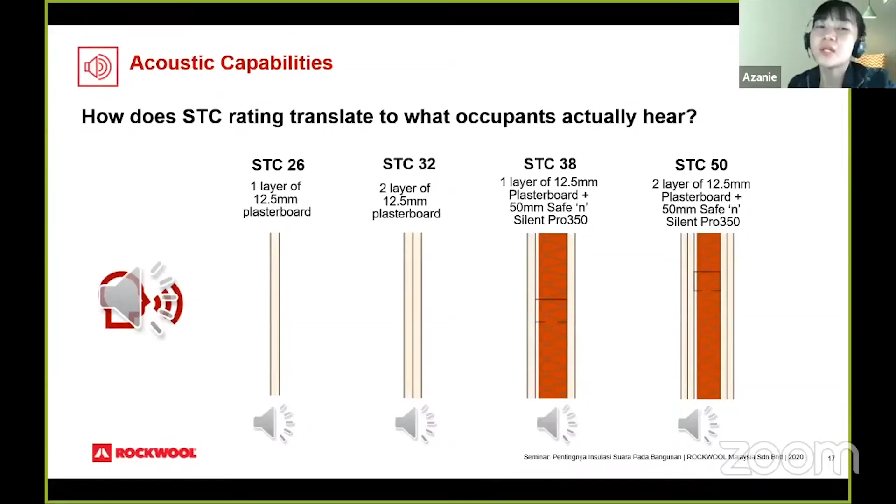So, STC measurement, how do you actually calculate it? STC actually, as I mentioned, you look into 125 up to 4000 hertz. So what they do is once you have this transmission loss, they plot it again against the reference curve.

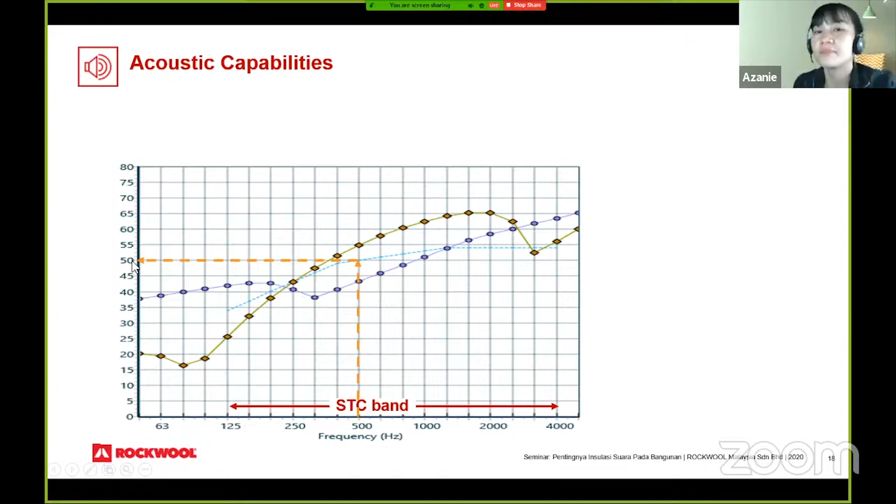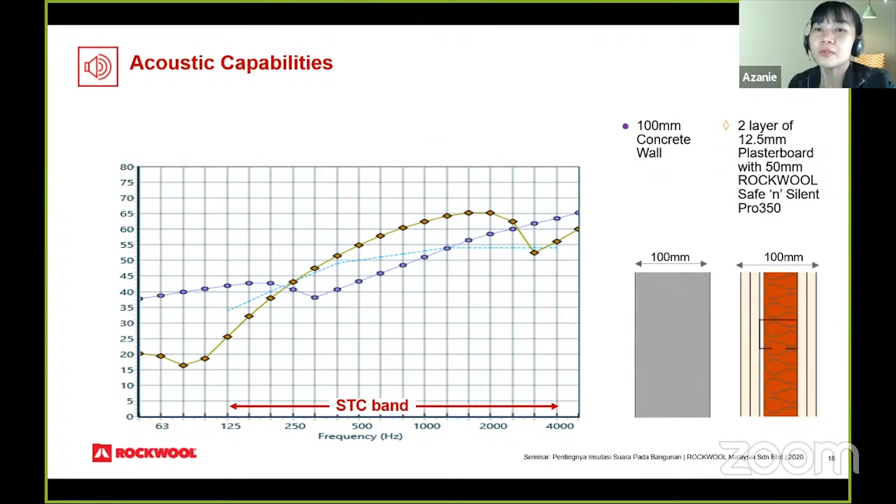So here I want to highlight the performance of two systems. One is actually a concrete wall, 100 mm. Another one is a drywall, also 100 mm. Roughly people think that because concrete walls have higher mass, usually they will have higher STC value. But based on this STC performance, you see that both are actually almost similar, where the drywall is around STC 50 and the concrete wall is around STC 49.

The thing is, with STC, it actually does not tell a full picture because of the measurement frequency range, looking into 125 to 4000. If you look here, the purple color would be the transmission loss of the concrete wall, and the yellow color would be the transmission loss of the drywall. You have here a deficiency for the drywall, which is the frequency resonance below 125. But because it does not take this into consideration, it's not accounted for.

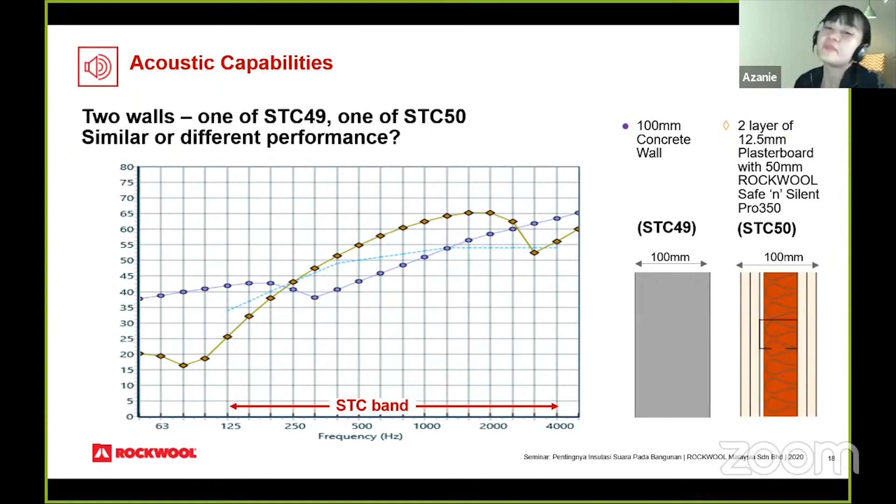At the same time, the concrete wall, with higher mass, has high low-frequency transmission loss, but again it does not get the benefit in STC. For the mid frequency range, you can see that drywall actually performs better and gets better performance in that area. So when we talk about STC, it's actually just an average decibel reduction. This average does not tell the full story - you may think it performs similarly, but depending on the noise and the sound we hear in the environment, we may see different performance in the field.

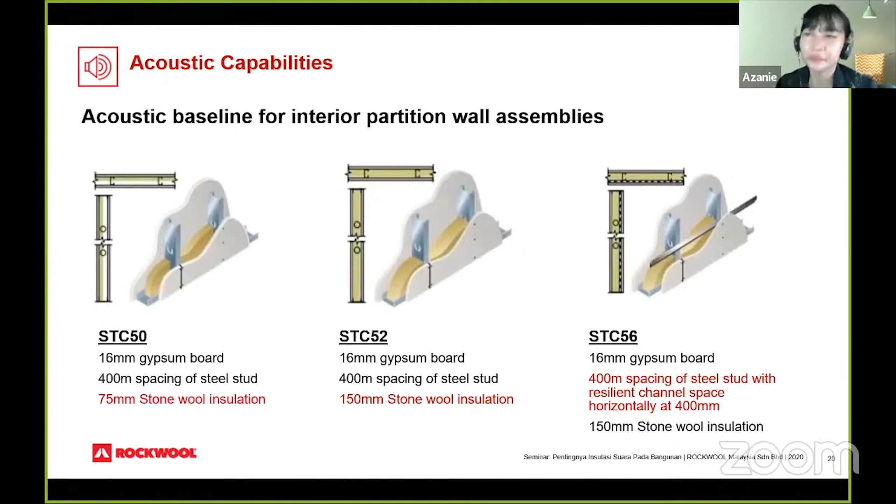Okay, another thing I want to highlight is how you can design for effective interior acoustics, especially in the office area. Let's say for example in an office area, you may want to put up certain partitions. Here, let's say you have a meeting room, and next door you have an open office area. The thing is, mostly people just look into the wall, thinking that putting up an acoustic wall can also block the sound passing through - because sound can travel so many ways. It can go up through the ceiling and pass through there.

So if you want to have, say, your wall at STC 40, putting up these kinds of modular ceilings is not advisable. It's very hard to get the ceiling performance you need, because if you look into the CAC, the ceiling attenuation class, you need a range of around 40 as well as a high NRC rating. It's very hard to find that kind of performance with a modular ceiling.

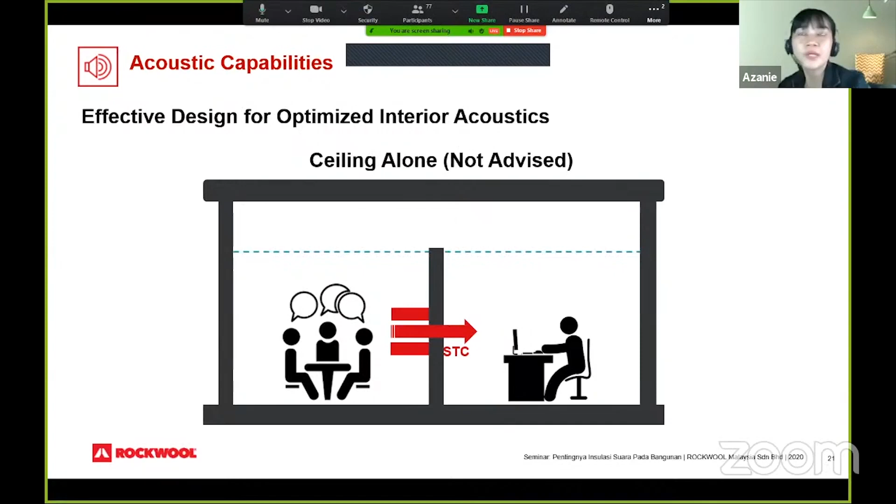So most of these ceilings are just very traditional, lightweight, a few layers, and they do not have enough mass to actually block the sound from one side to the other.

Another problem is that for an office, you have a lot of penetrations on top of the ceiling - light fixtures, devices, and HVAC. All of these can contribute to flanking sound passing through the ceiling, which makes these ceilings even less effective at blocking sound.

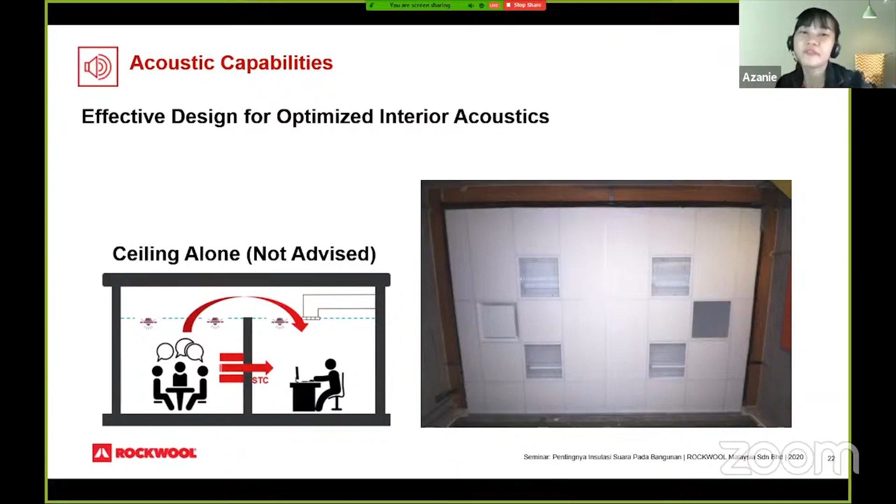So what can you do? Have a full height wall. So you have a partition that does not stop just at the ceiling - make sure it goes up to the floor level above.

Another thing is for any duct, use a rigid metal elbow duct with internal lining, which is insulation, over the air grille operator, and put acoustic sealant at every perimeter of the wall.

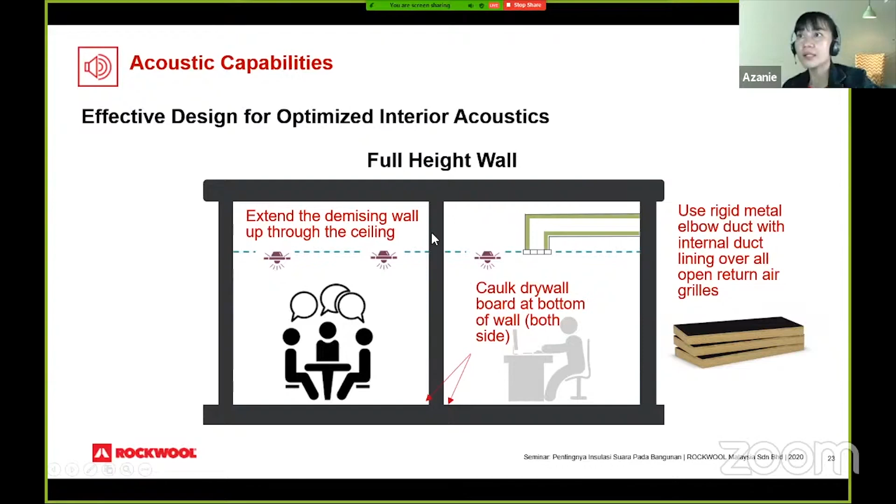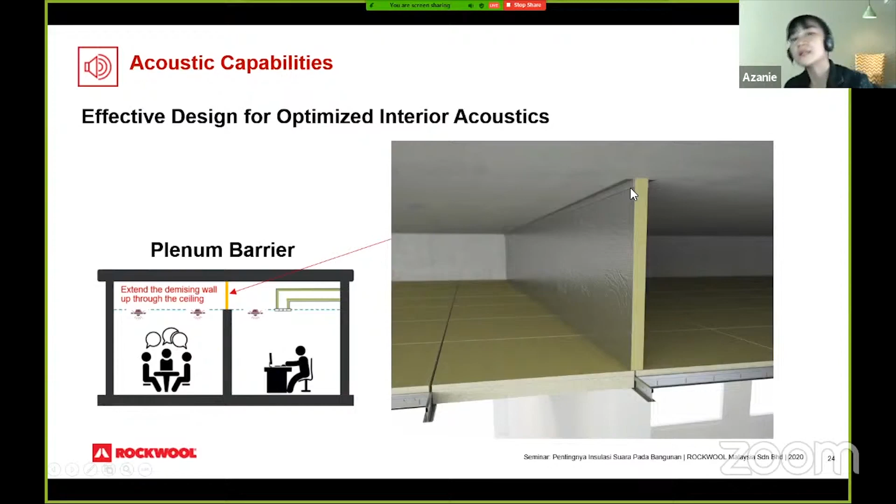Sometimes because of the design, the height of the wall only goes up to the ceiling. What you can do is also put a plenum barrier. This is just an example of a plenum barrier made with stone wool, where the only thing you need to do is very easy - you just mechanically fasten it between the support angles.

In this section, we want to look at why stone wool is an excellent acoustic solution. These are the four characteristics.

The first one would be airflow resistivity. When we say airflow resistivity, it's actually airflow resistance within a unit of thickness, which in layman's terms means how well you can block air passing through the fiber. The higher the airflow resistivity, the less air permeability, meaning less sound can pass through the insulation or material.

Density is another key factor that improves airflow resistivity. If you increase the density - here's the graph - you also increase the airflow resistivity, which allows less sound to travel through the material. So for some system performance, you may want higher density to achieve better sound transmission.

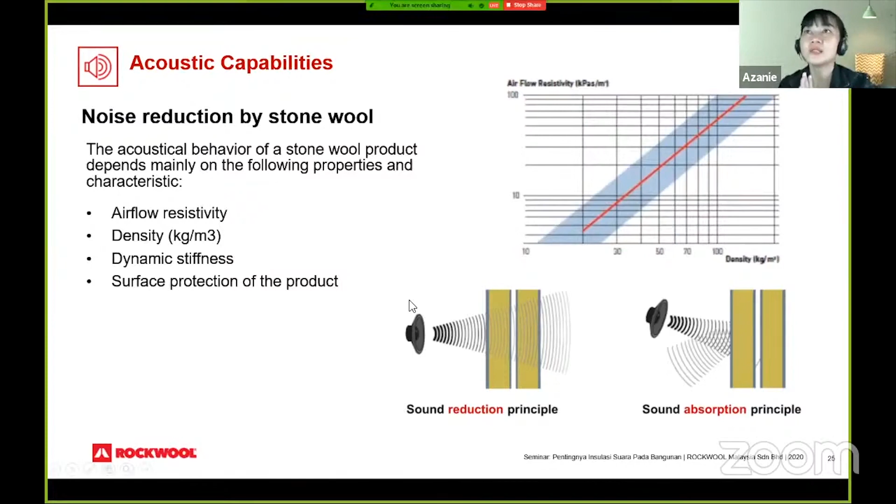Okay, let's look into rain noise performance. Metal roof has been a common design in any single building. The problem is with metal roof, especially in this tropical country, Malaysia or Indonesia, we experience very heavy downpours. All this water droplet fall onto the metal, and you can actually hear that drumming effect. So in warehouses, sometimes they just put metal with some reflective foil, reflective insulation.

It might be better in terms of thermal, but the issue is when it comes to rain noise, during the heavy downpour, you can't even hear what you're talking. Even just a person next to you, you can't hear what they're saying, because the drumming effect is very loud.

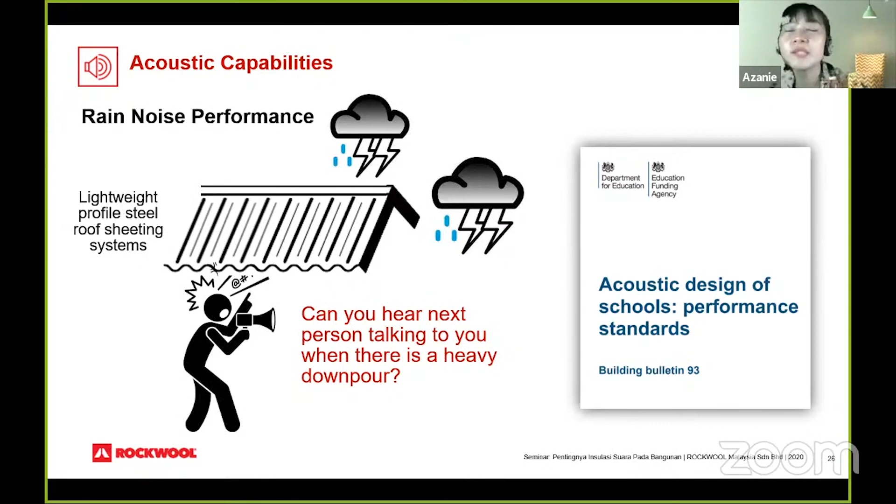There are not many standards that I know of that consider rain noise performance. There is one, BB93, a UK standard that does have consideration of rain noise. What they do is take the rain noise measurement, translate it to sound pressure level, and make sure that the sound pressure of that rain noise should not be more than 25 dB of the ambient noise of that particular room.

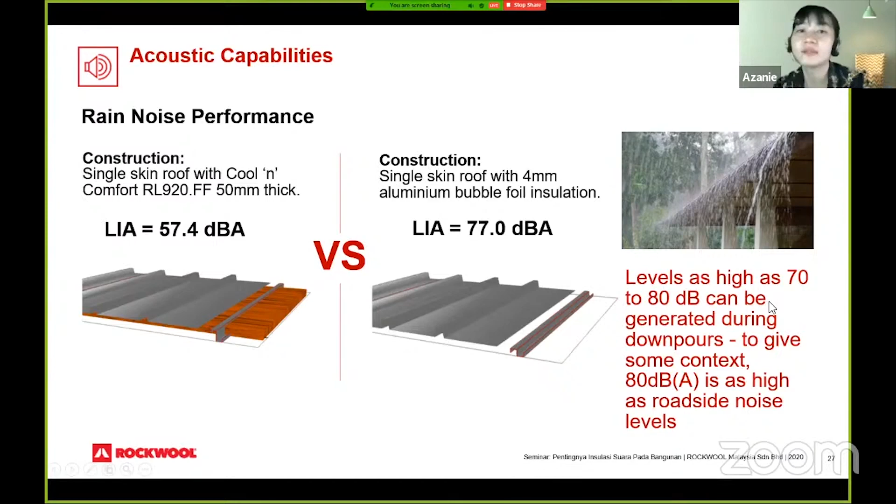Okay, what kind of system can you use with our insulation? Here are just a few examples. These are tested systems.

For single skin with insulation, you can find this in our brochure. Roughly, for 50 mm you will get STC 33, and for 100 mm you will get STC 38. We also put the rain impact noise based on rainfall intensity around 40 mm to 300 mm per hour.

So in this case, if you have a ceiling underneath, you will actually increase the STC value more, and you will reduce the rain impact intensity more.

Here is the case of double skins. A double skin without insulation, you will get around STC 30. Double skin with 50 mm insulation, you will get around STC 38. So the rain impact is worse without insulation, and you're able to reduce it by adding insulation.

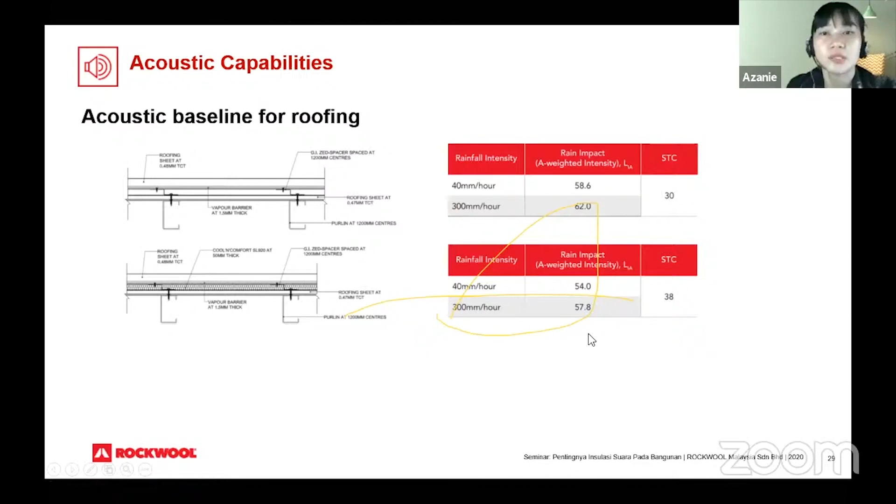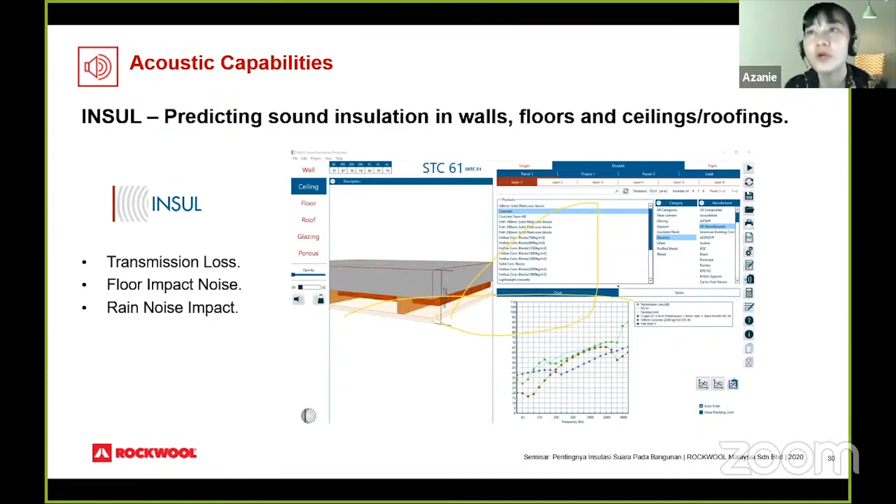We actually offer, through our software, to help any architect with a specific project determine the roughly performance measurements. What we use here is Insul software, which can measure the transmission loss, the floor impact noise, as well as the rain noise impact. So that is about it.

About STC. Now let's look a little bit into room acoustics. Room acoustic is the acoustic property within the room itself, measured through reverberation. As Pak Matthew mentions, roughly for a speech room you will need around 0.5 to 0.6, or if you want something like a musical room with high vibrations, you may want a higher reverberation sound. In terms of determining the reverberation of that particular room, you need to know the sound absorption value of the material.

Okay, there are two performance measurements. The first one is NRC, calculated based on ASTM C423. It's just an average sound of 250 to 2000 Hz. They do the measurement to get a performance value from 0 to 1. So if you look into the material data sheet, you will see that the NRC is around 0.5.

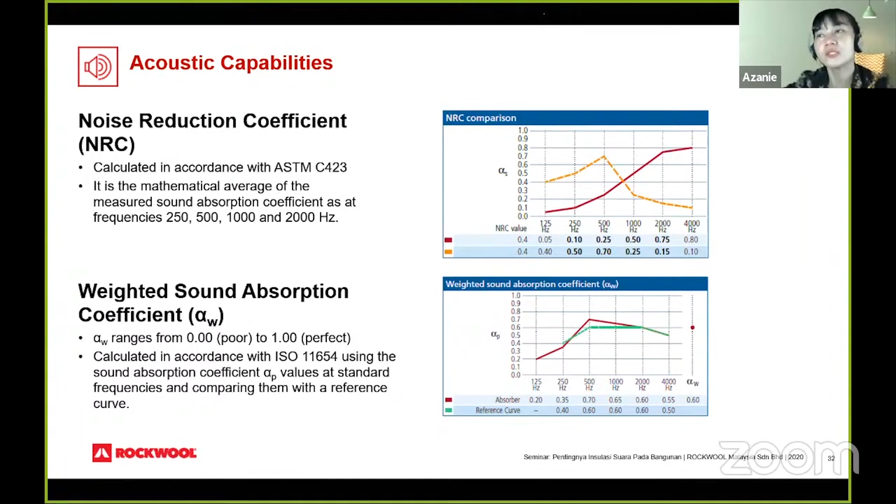So roughly it's slightly absorb as well as slightly reflect, where 0 is totally reflect, 1 is totally absorb. Another measurement they may want to look into is the weighted sound absorption coefficient, an ISO performance. It's the same: 1 will be total perfect absorption, 0 will be total reflection. It's just that sometimes the measurement value on how to do the single rating is slightly different.

In terms of our Rockwool Stonewool, here's an example, you can get more information from our data sheets. For Safe'n'Silent, we're roughly around 50mm. So it's based not just on material, it's also based on thickness. In this case, the higher the thickness, the better the NRC value. For the Safe'n'Silent partition product, roughly we're around 0.9 and the rest around 1. For Cool 'n' Comfort, mostly for roofing application, will be around 0.9, will be around 1 value.

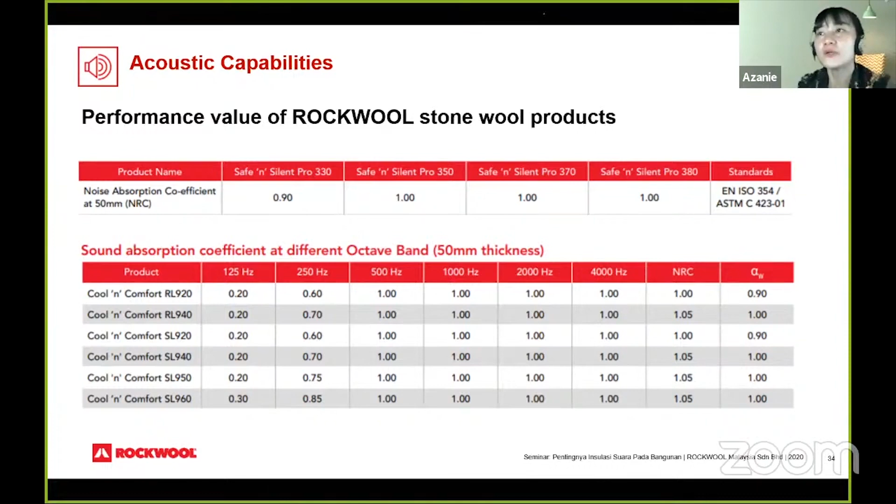We also put the measurement of the value at every single frequency.

Rockwool stone wool is actually a porous material. It consists of coherent material and cavity, which makes it a very excellent material to absorb. We are very resilient, and absorb all the vibration. We convert all that acoustic energy into heat.

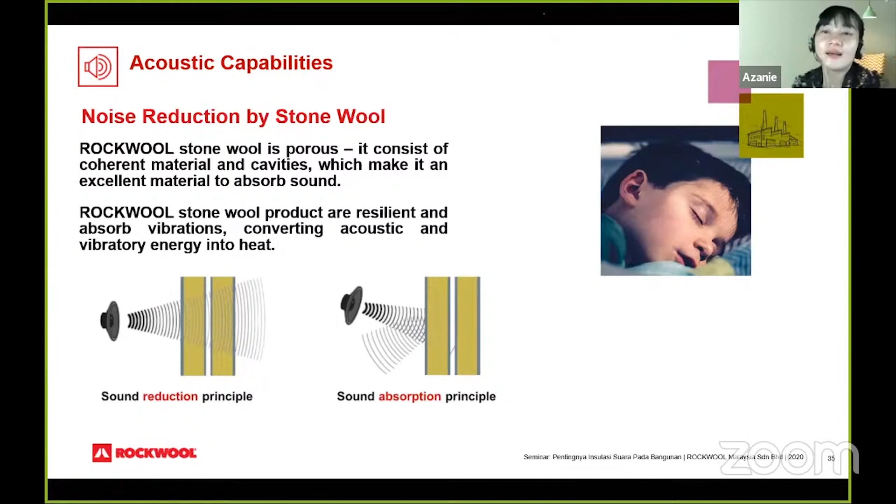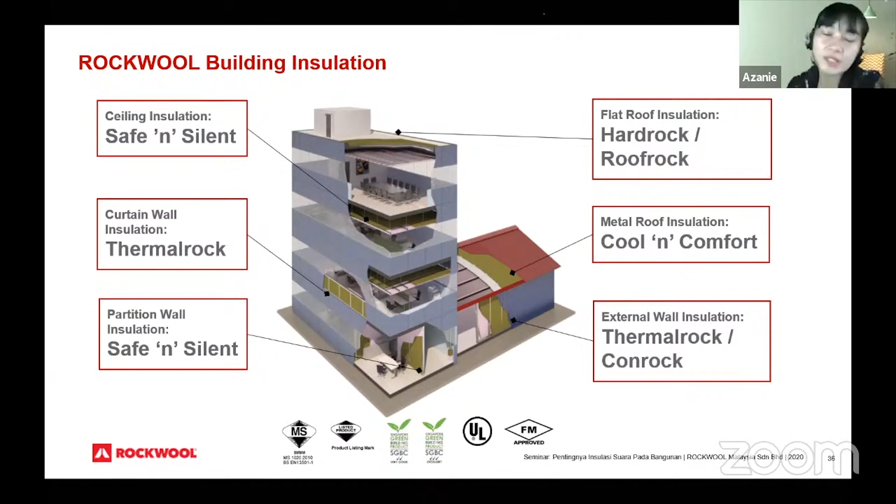That's it about insulation. So just roughly, I want to talk about our products. We have a variety of product models depending on the applications. You can find more from our representative in Indonesia.

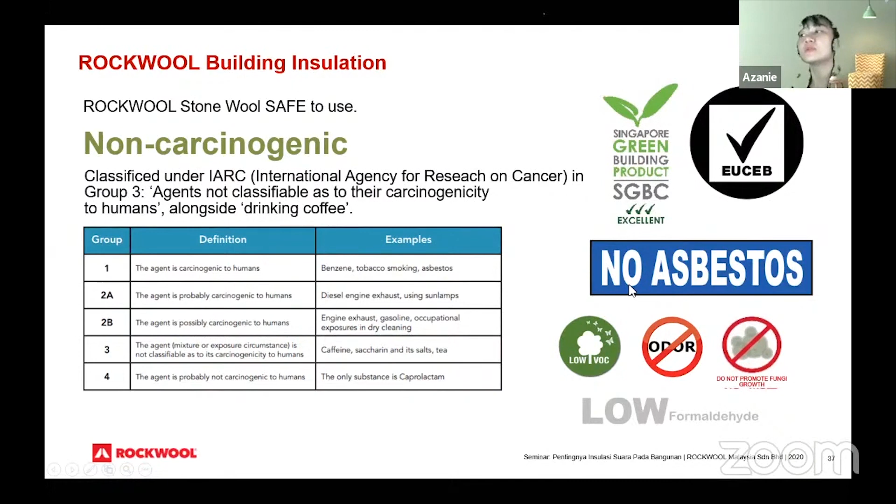Some of you may have concerns about safety, because you think that handling Rockwool, you might inhale the fiber and it has detrimental health effects. But let me tell you, we are safe to use, safe to install, we are non-carcinogenic. It has been classified under IARC, one of the organizations under WHO, that says our rock wool stone wool is non-carcinogenic, under Group 3. We also have some of our product material Green Label certified. We have no asbestos, low TVOC, no odor, does not promote fungal growth, and low formaldehyde.

You can browse our Rockwool Asia website, where we have some tools to assist in your specification or project. We have BIM for you to use. We have an RT60 calculator, which is the room acoustic calculator. We also have U-value as well as specification toolkit.

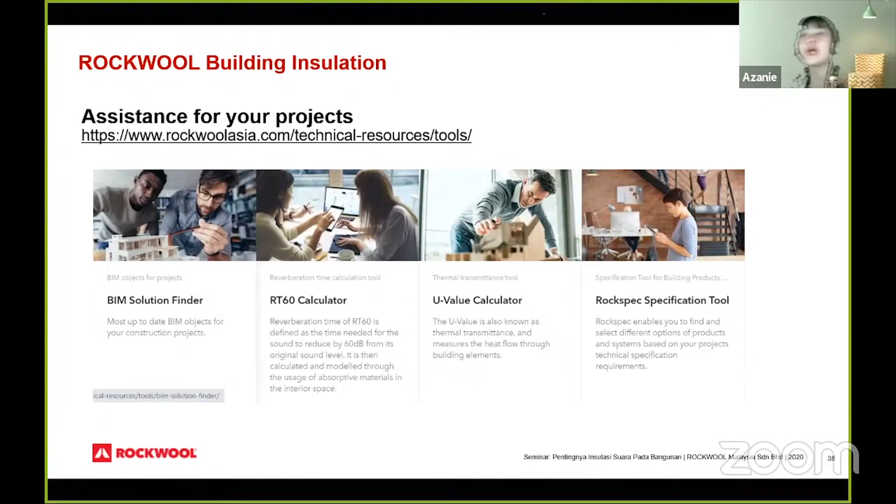Okay, with this I end my presentation with this video. It's actually a very nice video by our Rockwool group talking about the acoustic performance.

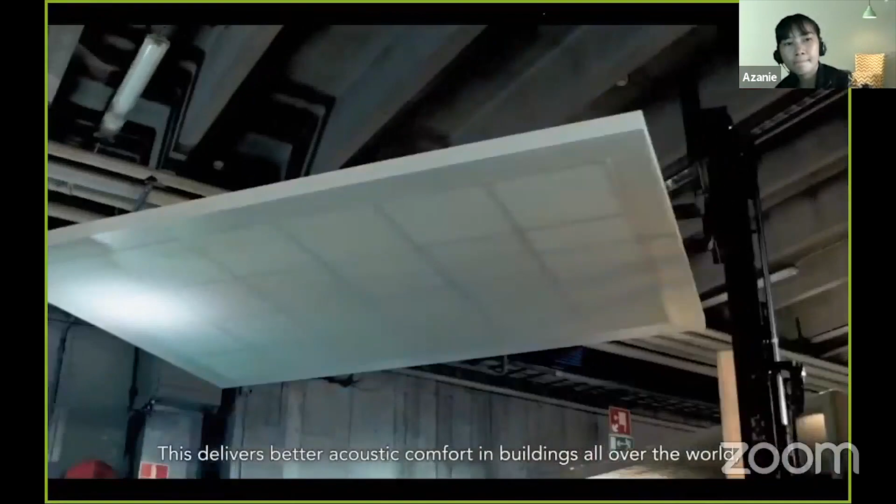Hi, I'm Sten Lindby, head of R&D at Rockwool, and these are the Stone Rockers, our company band. I'm here to talk about the amazing acoustic capabilities of our products. Through sound insulation and absorption, our products can optimize the acoustic performance of a room. This delivers better acoustic comfort in buildings all over the world, from offices and schools to hospitals and hotels. Unfortunately, it also means that the Stone Rockers think they sound better than they actually are. Luckily for us, Stonewool also has amazing soundproofing capabilities, helping to isolate and control vibrations and block out unwanted noise. For peace and quiet when you need it most. Back to work.

Acoustic capabilities is just one of the amazing seven strengths of stone we harness in our products to enrich modern living. If you need any more information, you can contact our representatives in Indonesia, Pak Leonardo and Carolina. With that, thank you.

Thank you, Ibu Azanie. Very interesting presentation. You get the basics of how sound works with the STC and dB standards, and other standards that you explained before.

Oke, artinya ini bisa dilakukan sebenarnya dengan cara mengukur suara di dalam ya, tanpa perlu simulasi kan sebenarnya? Ya, betul. Oke. Kebetulan ada proyek saya juga, saya lampirkan nilai tabelnya. Nah, seperti ini.

Tingkat bunyi yang dianjurkan. Jadi misalnya ruang kantor umum 40 sampai 45, itu cukup dengan spectrum analyzer, kita ukur di situ berapa suaranya pada saat ada suara yang besar tadi, pada saat ada bola gitu. Jadi misalnya kayak ini yang kebetulan saya highlight biru itu untuk kantor umum, nilainya perlu sekian gitu.

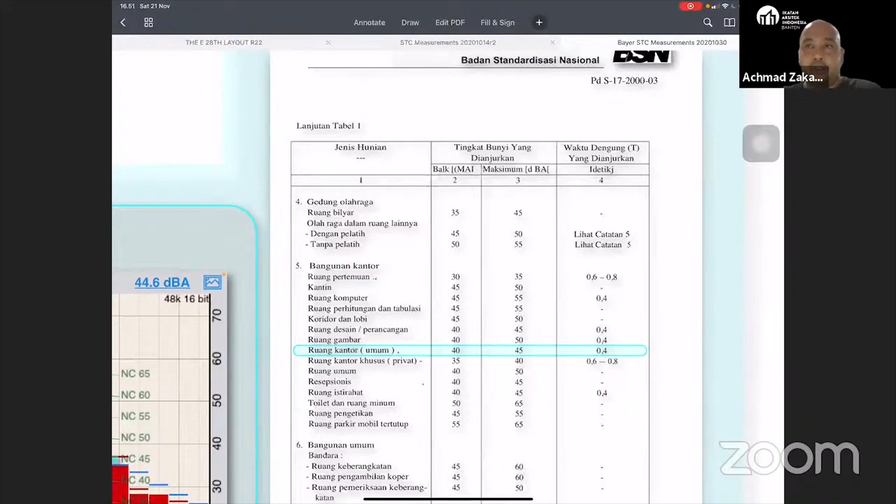Oke, yang sebelah kanan adalah reverberation time yang tadi disebutkan Bu Azani. Harus begitu, Pak. So, Pak, itu referensinya tadi ada di situ ya, referensi SNI, di sini, tabel ini. Oke, bisa di-capture, itu nantinya bisa jadi referensi rujukan ya untuk Bapak Muhammad Arif ya.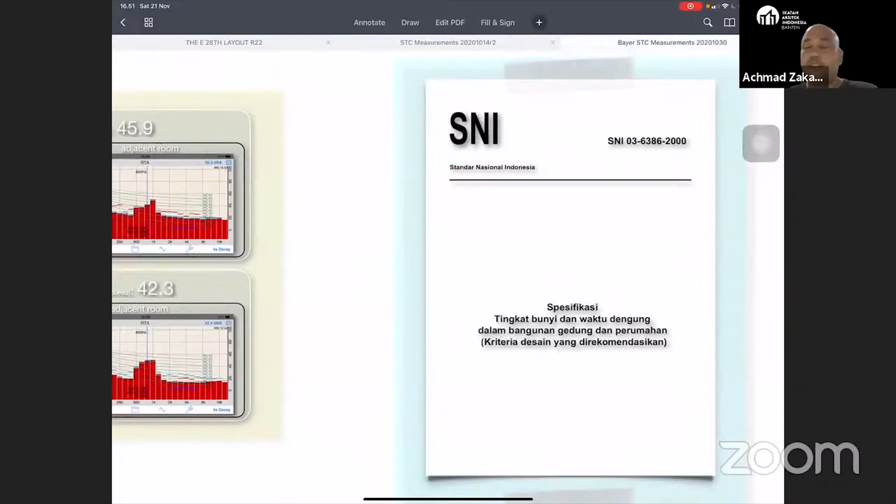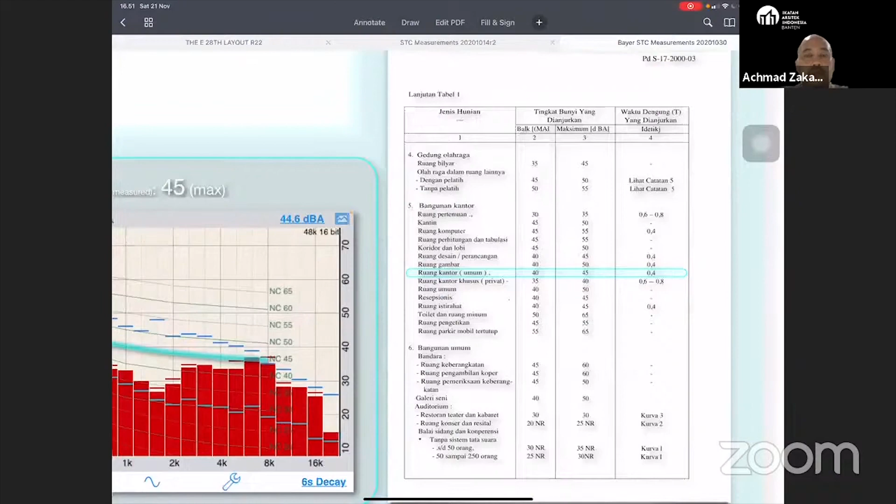Sehingga apapun ruangan di situ, apakah semua ruangan ada di situ, Pak? Beberapa ya, ruangan pada umumnya, Pak ya. Di sini ada hunian, ada office, ada macam-macam di satu bundel tabel tersebut, satu bundel dokumen tersebut ada berbagai macam ruangan. Oke, bahkan bandara juga ada dan sebagainya.

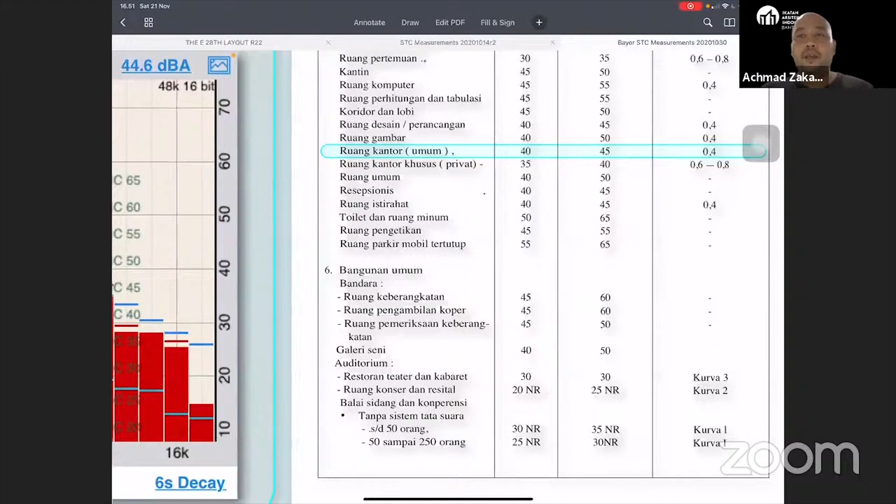Oke, tapi untuk meramu STC berapa yang dibutuhkan, itu perlu diskusi yang lebih ya Pak. Artinya perlu advice Bapak atau Ibu Azani misalkan. Betul, perlu advice dari konsultan tentunya, supaya menjadi fair buat semuanya. Ya, terutama masalah budget juga ya berarti. Betul Pak, dan impact segalanya ya, waktu dan sebagainya.

Waktu betul. So Bu Azani, do you get the question about the office next to the stadium? We Malaysia does not have any specific guideline, but we do have under GBI roughly just saying what's the guideline for the ambient noise, that's all for particular area. For that, that's the only cases. But sometimes it depends on the consultants what kind of the guideline that they want to use for that particular design of the buildings.

Okay, so another question from me following Pak Muhammad Arif is, in your presentation you're talking about interior, you're talking about ceiling, you're talking about the roofing insulation. So what about the facade? Can your material go in the facade as well?

A facade, usually it depends. If you have got the wall, it's mostly glasses, you don't use insulation as much, only on certain floor area that is mostly for the fire performance. But that's just a very small area.

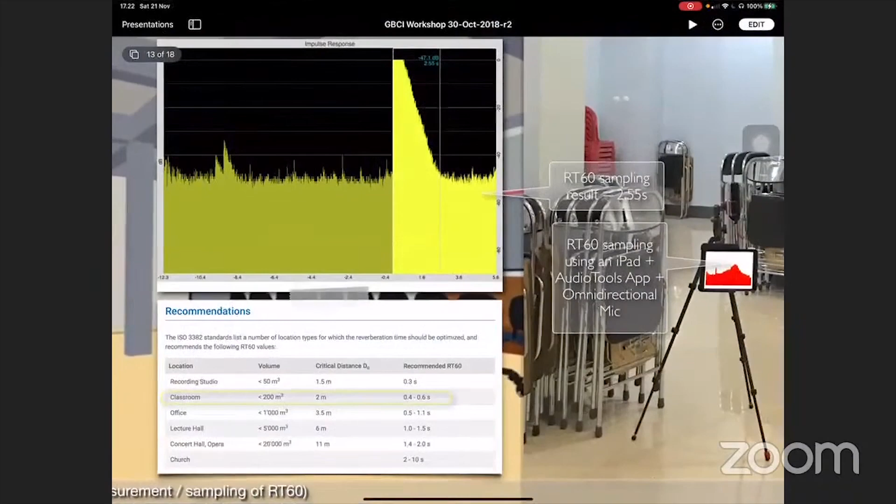Itu yang kita lakukan, modeling dari berbagai bahan. Jadi kan alternatifnya ada macam-macam.

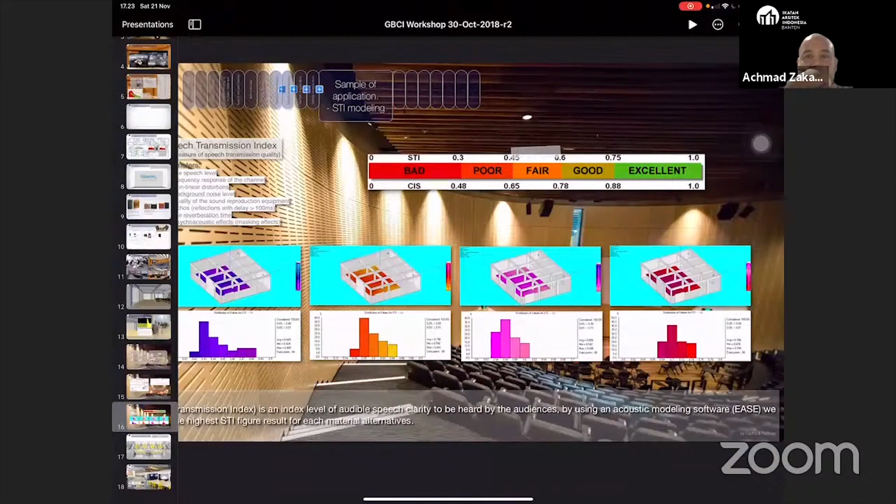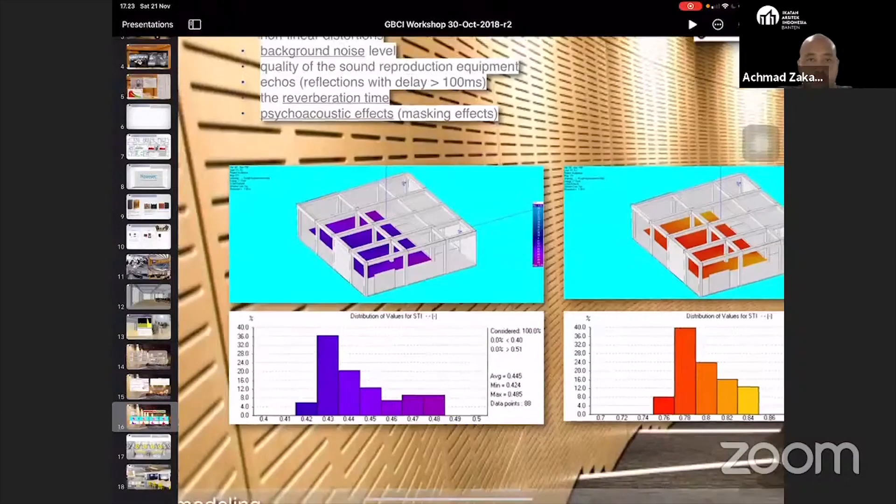Nah, di sini terlihat Pak. Dari bad, poor, fair, good, excellent, makin tinggi angkanya makin baik. Jadi misalnya di sini untuk menggunakan material ini ada speknya masing-masing. Kita perlu angka yang paling tinggi. Ini tabelnya, ini tabel hasil modelingnya.

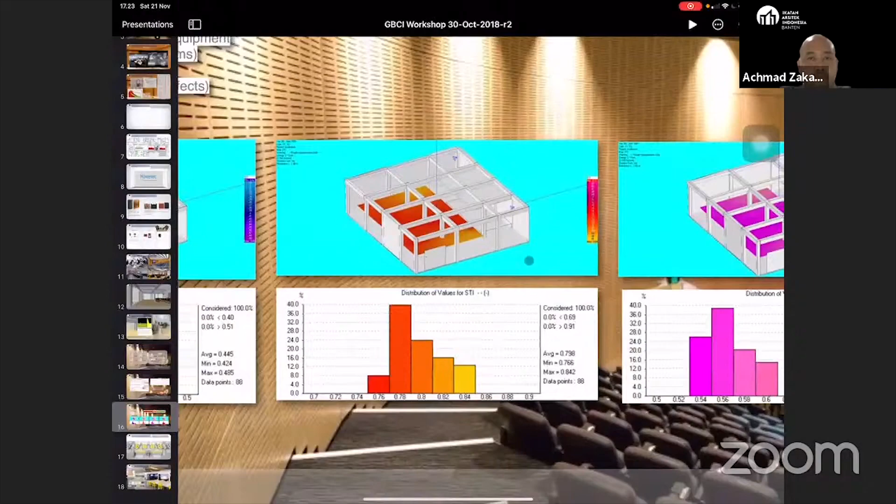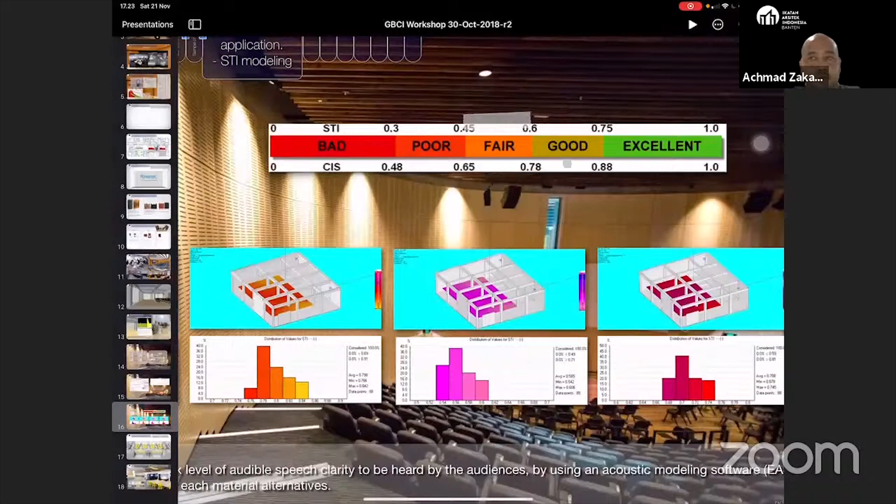Berbagai di sini ada 4 alternatif bahan, yang nilainya paling tinggi mendekati 1 itu adalah yang terbaik. Jadi misalnya bicara dengan owner gitu, kamu minta budget sekian besar untuk apa? Dasarnya dari apa? Nah, ini dengan cara modeling begini kita bisa melihat nilai mana yang paling tinggi.

Ini menggunakan software Speech Transmission Index, itu untuk auditorium. Jadi selain daripada memperbaiki akustik di dalam ruangannya sendiri supaya suara di dalamnya baik, juga sound blocking keluarnya bisa diperhitungkan. Pertanyaannya begini, suara di dalam ini mau seberapa keras, berapa dB yang disampaikan sehingga kita tahu STC berapa yang diperlukan.

Jadi pertanyaannya beruntun. Berapa keras atau berapa dB? Terus untuk suara apa, suara speech atau suara musik? Karena kalau musik itu lebar frekuensinya dari rendah ke tinggi. Kalau hanya untuk speech, ya hanya di frekuensi tengah yang kita blocking.

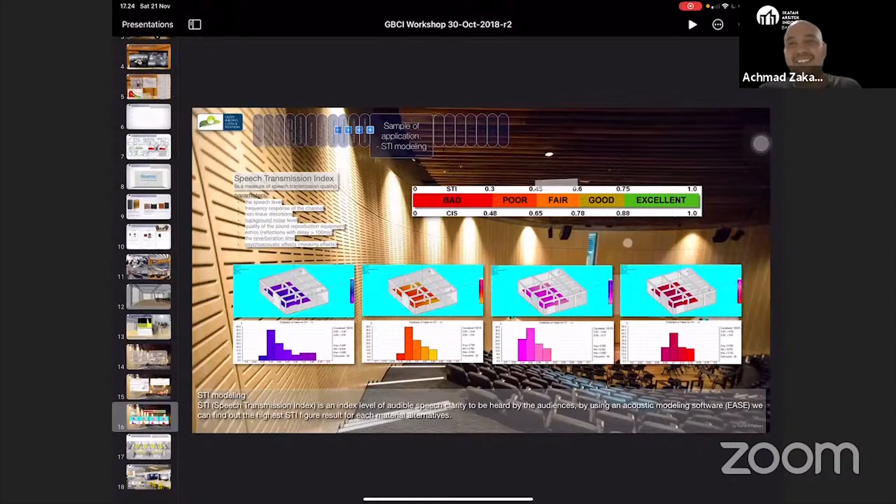Jadi pertanyaannya banyak sih Pak, memang tidak semudah itu, harus dilakukan perhitungan dan sebagainya. Betul, kelihatannya sangat teknikal dan perlu perhitungan engineering yang lumayan panjang ya Pak untuk itu.

Kalau diperlukan ya, karena ruangannya sudah jelas untuk opera house atau untuk teater. Jadi mungkin disarankan untuk ruang-ruang seperti itu perlu ada akustik konsultan ya Pak. Betul, karena kalau sudah jadi terus baru diperbaiki, biayanya menjadi berlipat ganda dan waktunya terbuang banyak. Betul, jadi cost dan time itu ada impact-nya.

Ada satu rumus dasar buat teman-teman arsitek, semacam tips. Kalau misalnya membangun suatu ruangan yang sifatnya diperlukan akustik yang baik, panjang kali lebar itu jangan kelipatan. Jadi misalnya panjangnya 8 meter atau lebarnya 4 meter, panjangnya jangan 8 meter, tidak boleh 12 meter. Jadi bisa 9 meter atau bisa 11 meter. Jangan pernah panjangnya itu kelipatan daripada lebarnya. Itu untuk mengurangi reverberation time. Itu langkah pertama, karena kalau salah dalam menentukan dimensi, biaya treatmentnya akan menjadi lebih besar daripada yang semestinya.

Oke, ya itu ilmu baru tuh Pak. Ya ilmu lama sih Pak, nggak buat saya Pak, buat saya. Oh iya, kalau buat Pak pelajaran dari lama ya, tapi buat saya arsitek ternyata itu baru tentang kelipatan itu.